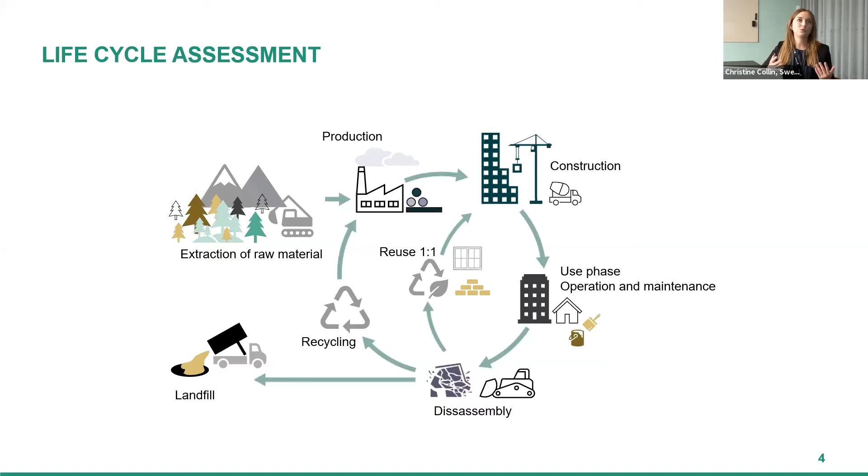And then of course we have a long use phase where we need to operate and maintain our buildings. Perhaps we need to replace some of the building components. And at some point we may need to retrofit or disassemble the building, where we can also either recycle or reuse some of our materials again.

Throughout Europe, we've had a very narrow focus in many years on energy performance of our buildings, on the operational energy use. And what I see in especially the UK, you've started to also have a great focus on the upfront carbon emissions from your buildings, where especially, of course, also structural engineers can make a huge difference.

And when we talk about whole life carbon, we need to, of course, include the entire life cycle of a building. So both the upfront carbon, also the embodied carbon during the use stage when we maintain, repair and replace the materials, and also the end of life carbon when we deconstruct, transport, and also the waste processes and the disposal. So when we talk about the whole life carbon, it's both the embodied carbon and the operational carbon.

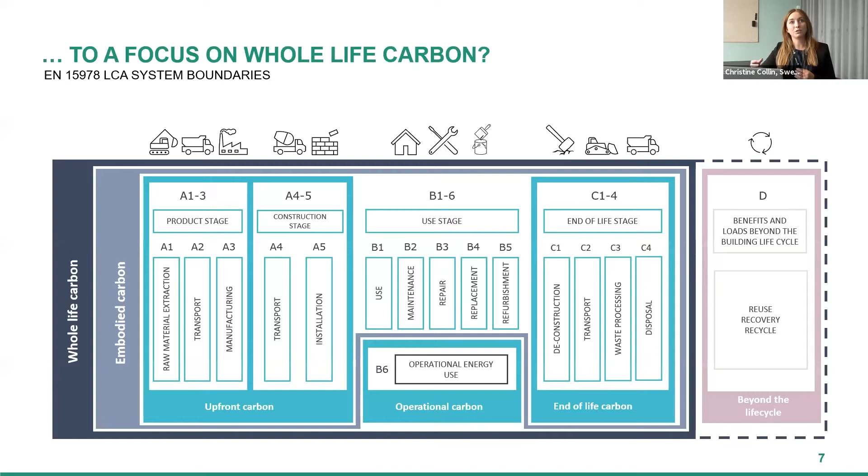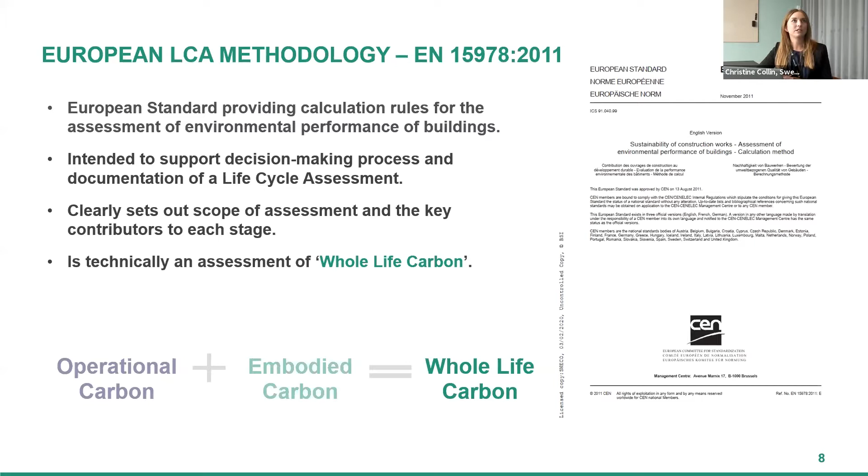And it's based on this European standard, which sets the calculation rules for the assessment and is intended to really support the decision-making process and the documentation of a life cycle assessment. I won't go into more detail with that.

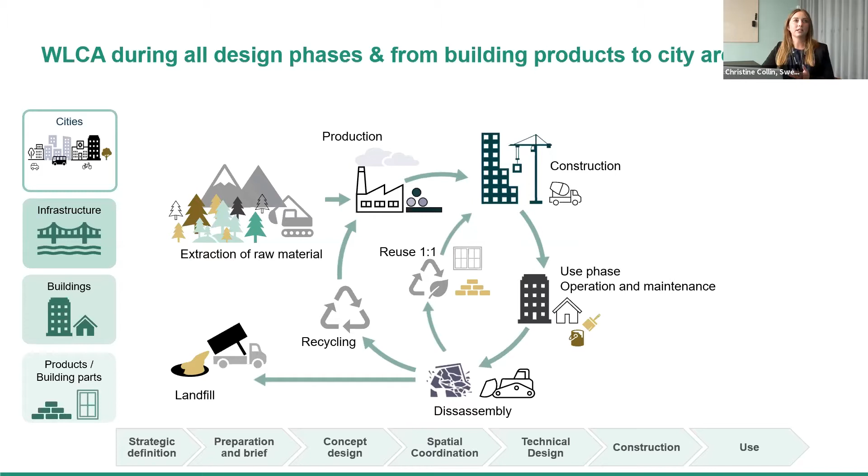But what we see is you can really use the whole life cycle carbon or whole life carbon assessment during all design phases, and also from both building products to building elements, larger buildings, infrastructure projects, or even city areas. But of course, you need to work with it in different ways depending on the type of project and also in which project stage you're at.

Oftentimes it's only conducted at the very later stages when we have a lot of information, because we of course need a lot of information to conduct these assessments. But then it really is just a declaration of the carbon emissions. It will grant you some credits in the certification system, and you may be able to use it in the CO2 accounting, but you can't really make any design changes at this point.

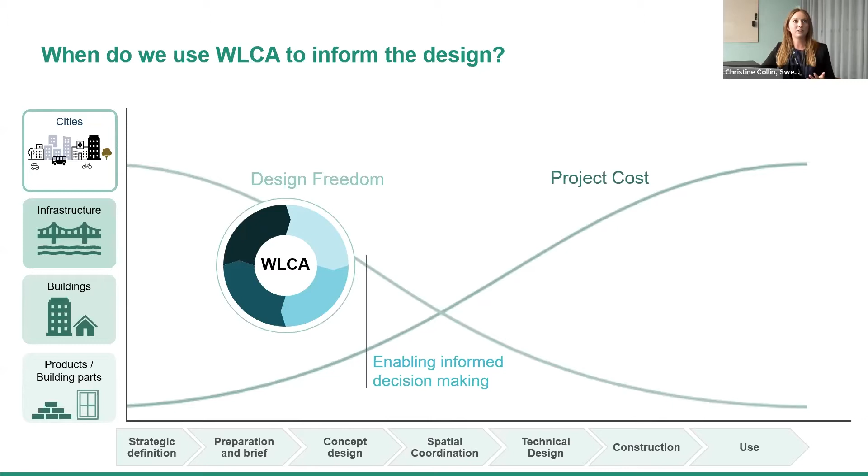So what we're really trying to do a lot of the time is move these whole life carbon assessments to the earlier design phases, where we can actually enable an informed decision making. That is of course difficult when you don't have a lot of information, but there are various ways to work with it anyway. So for example, in the very early phases in the strategic definition, you may not have any real quantities, areas even, but you will probably know what type of building you want to build, and for that you can set targets.

And I can see that in the UK you have both RIBA and LETI; they've come up with some suggestions for potential targets that you can set for a building. If you're a large engineering or architectural consultancy, you may also have your own benchmark database where you can look at where an office building of a certain size previously ended up CO2 emission-wise. And in that way, be able to set either ambitious targets or just normal targets for this building.

Then, of course, you can also use a whole life carbon assessment in a sort of screening way, so that you ensure you meet the target, even though you don't know a lot about what materials are going into the building at this very early stage. You may be able to use standard building components that you are traditionally using, start out with that, and see if you're able to meet the target. If not, then proceed with optimization.

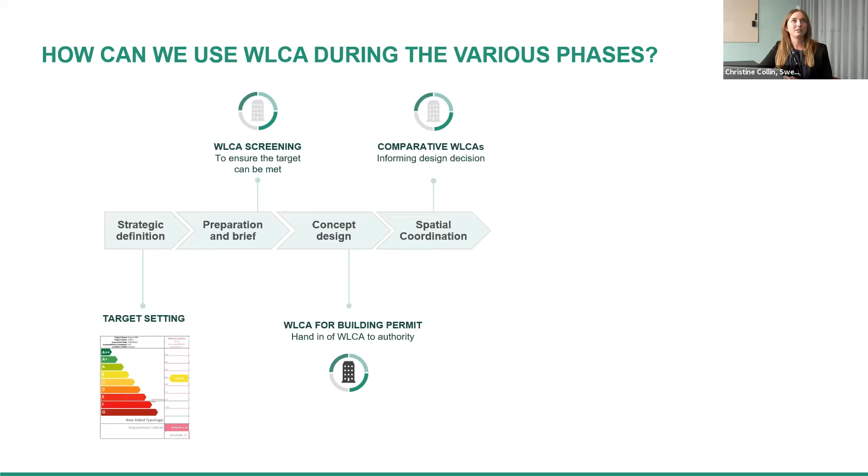And during the design, we can make comparative whole life carbon assessments, comparing different solutions to each other, and in that way make informed design decisions. That can not only be on carbon, it could also be on cost, on energy, on many various aspects.

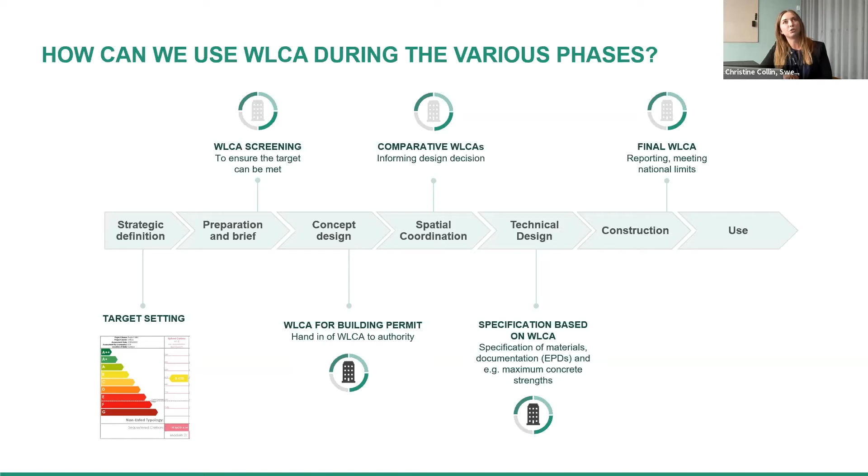And then, of course, we can use the whole life carbon assessment to also know what we should specify. That could also be that we want to specify that the materials used in the building have declared their carbon emissions. That could be something like EPDs, environmental product declarations. And then, of course, in the end, we'll have a final reporting ensuring that we're meeting national limits or the limits set by the client.

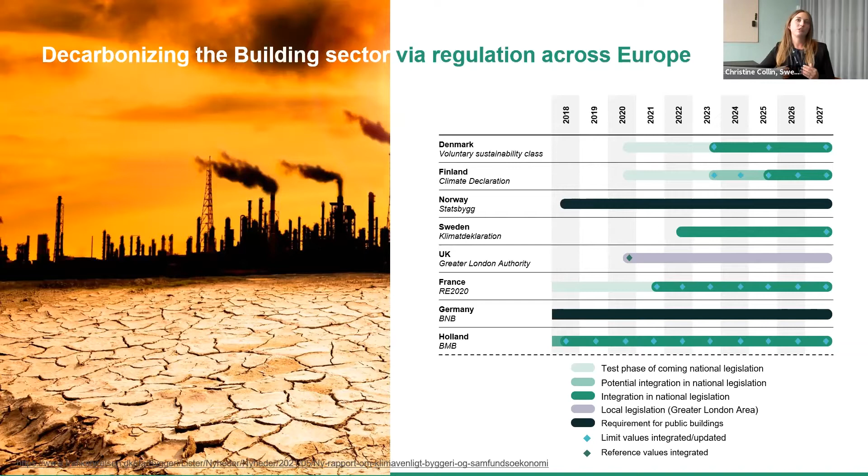So now I'm getting back to the regulation across Europe. As I said, in Denmark in 2023, we'll have national legislation in our building requirements that we need to conduct whole life carbon assessments for all new buildings. And for buildings above 1,000 square meters, they also need to comply with a certain limit that we cannot go above. And actually, we see the same picture in many of the European countries. In the UK, you have a local legislation for the Greater London area, which was introduced in 2020. So there are various ways of introducing this across countries in Europe.

And what I'm about to say with that is, here in Denmark, I've just listed the limit values that we have, and you may find them hard to translate into what makes sense in the UK. And also it's really not something that you should do, because, for example, in Denmark, when we calculate the square meters of our buildings, we also take into account the outside of the walls, whereas I believe you're on the internal side of the outer walls in the UK. So when you have a limit value which is per square meter, it will be completely different.

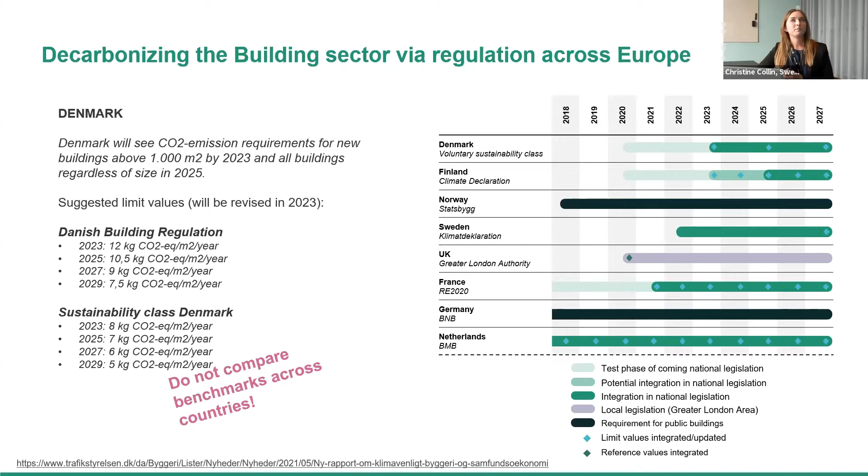And some other things that are also different across the countries is that the different countries actually look at different life cycle modules. So even though we all have the same European standard, not all countries are focusing on all the life cycle modules, because some of them can be quite hard to quantify and we don't have a lot of data for them. So that's another reason why it can be difficult to compare between the countries.

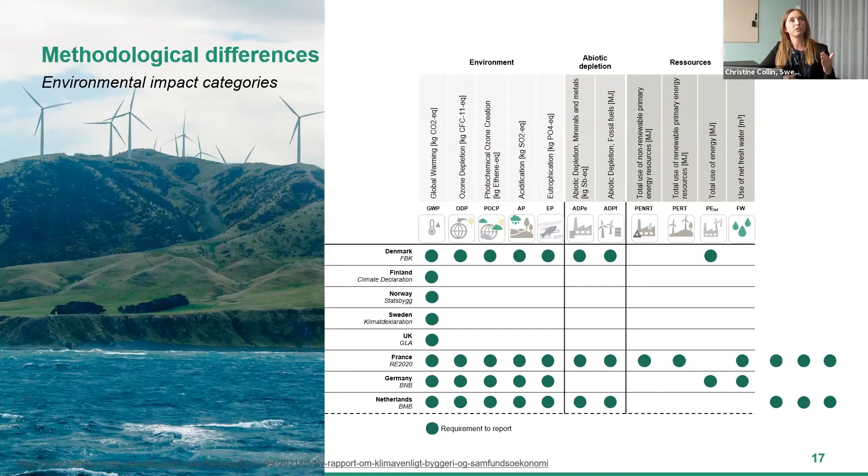Similarly, now we're talking about carbon emissions, but actually in a lot of the European countries, Denmark, France, Germany, the Netherlands, we are not only to report on carbon, we also report on a lot of other environmental impact categories. And in France and in the Netherlands, you can see I have put some more dots because they actually report on even more impact categories. Of course, the focus is often on global warming potential, and so it should be. But we do see an increase in clients also asking us to specifically report on reductions in some of the other environmental impact categories.

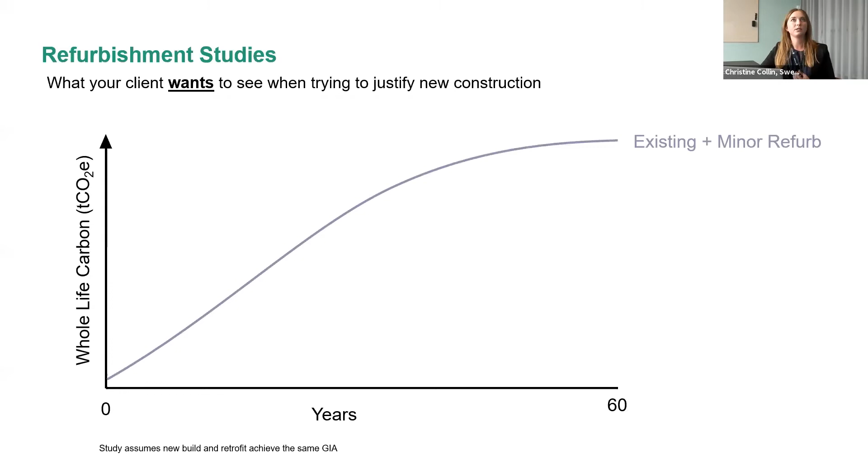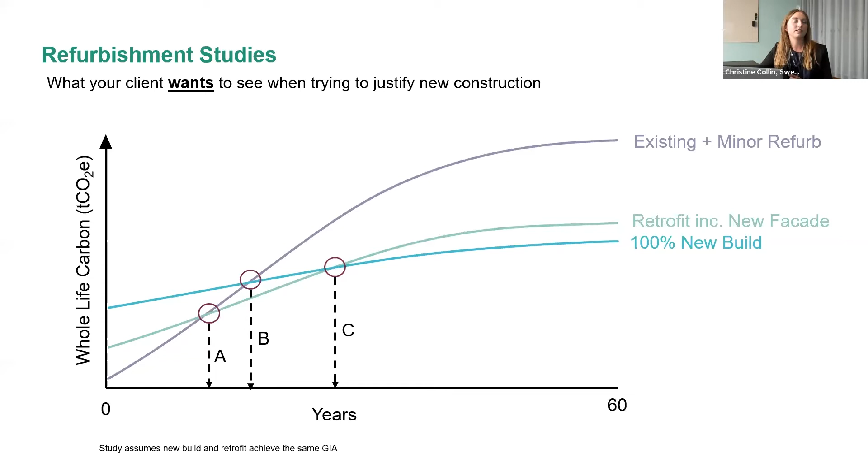Then I have a short case on refurbishment versus new build, because this is one of the cases where it can be really important to look at whole life carbon assessments. So often we have clients that want to justify a new construction. They say the existing building with a minor refurbishment will just have a lot of CO2 emissions over the years, whereas if we do a larger retrofit and a new facade, we can decrease the emissions over a 60-year lifespan. And they say, well, a new build will be a lot more efficient and therefore have even lower CO2 emissions. But it's often really not the case.

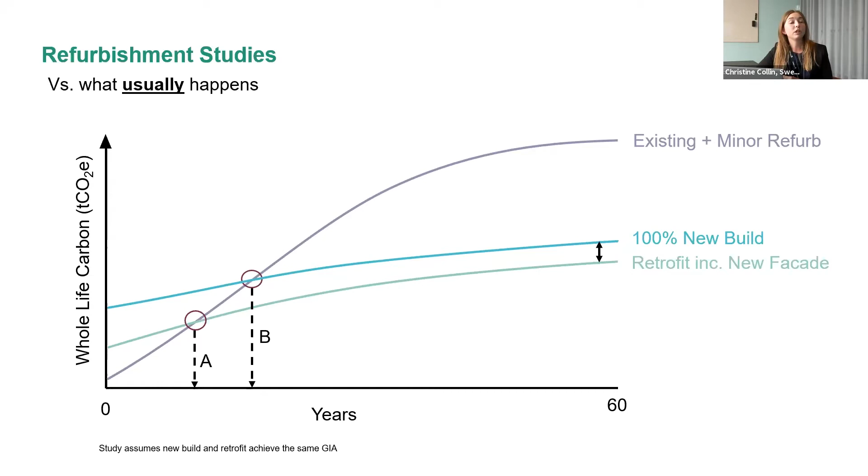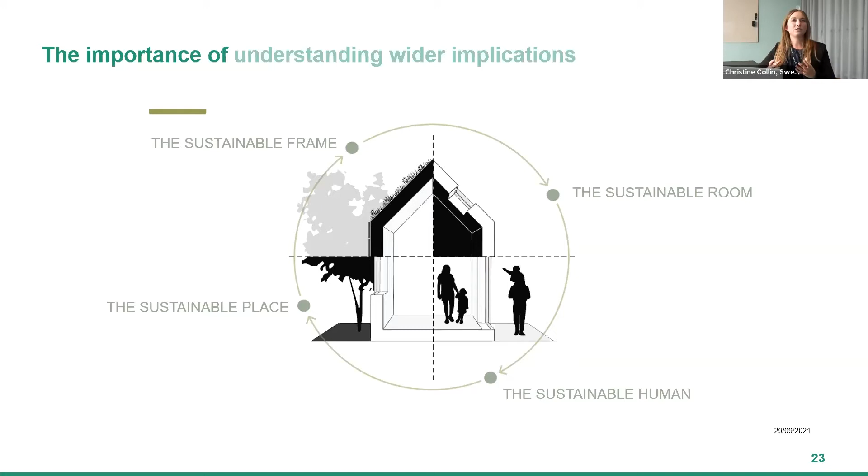And we do also see some projects where it perhaps will make sense to build something new. And this is also a new building according to the standard building regulation that can of course be improved tremendously if you design for it. So collaboration is key in this. And we often talk about the sustainable frame, the sustainable room, the sustainable place, and the sustainable human. And it is important that we take all this into consideration when we design our buildings.

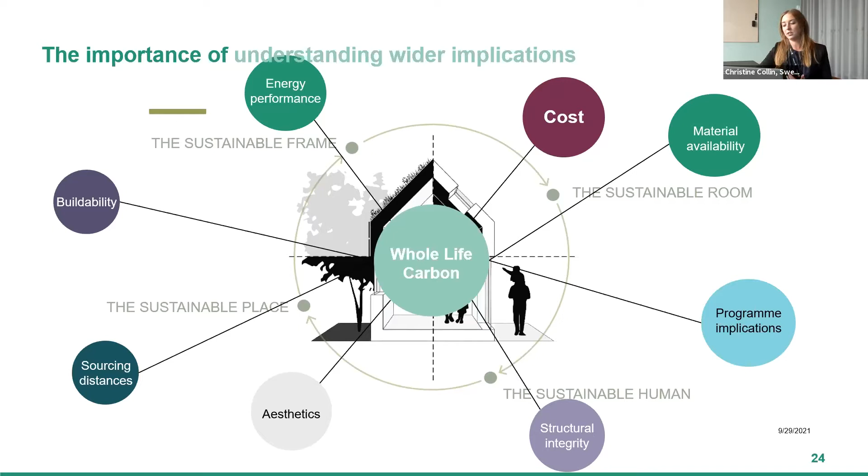And there are a lot of things to really take into consideration: cost, material availability, especially now. I don't know how the situation is in the UK, but in Denmark, it's really, really hard to get materials. Sourcing distances, aesthetics, and these sort of things, and really have it all come together.

And one thing I didn't have a lot of time to talk about is, for example, circular design, which might not benefit us here and now when we are designing our buildings, but we also really need to consider how we can design so that we can use our buildings as material banks in the future, making sure that we're able to continue to directly reuse building components.

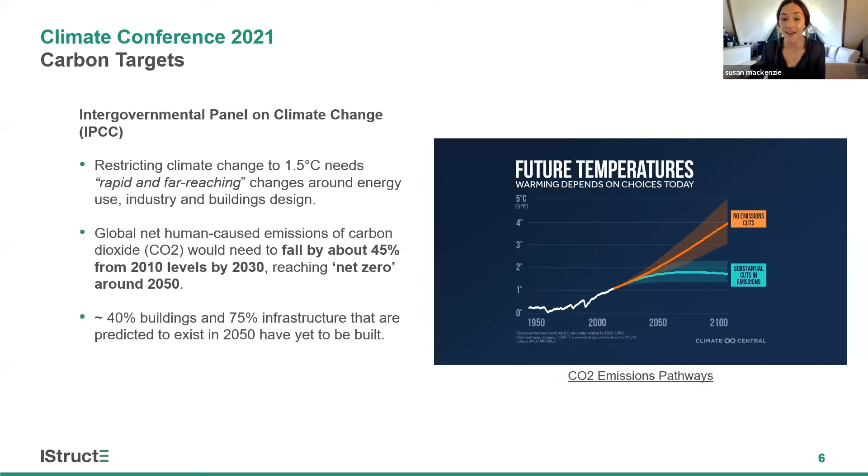And just to pick up one of the things there, so 40% of the buildings and 75% of infrastructure that are projected to exist in 2050 have yet to be built. So just to show the scale of what we're dealing with here. Yeah, in terms of the built environment and buildings kind of targets.

So within the UNFCCC, there's the Marrakesh Partnership, which was launched in 2016. And that is responsible for setting out the climate action pathways for how we get to a 1.5 degree Celsius resilient world. And one of those pathways is the built environment one, which you can see on the screen here. It's a really interesting report actually, and the table here sets out the milestones to 2050.

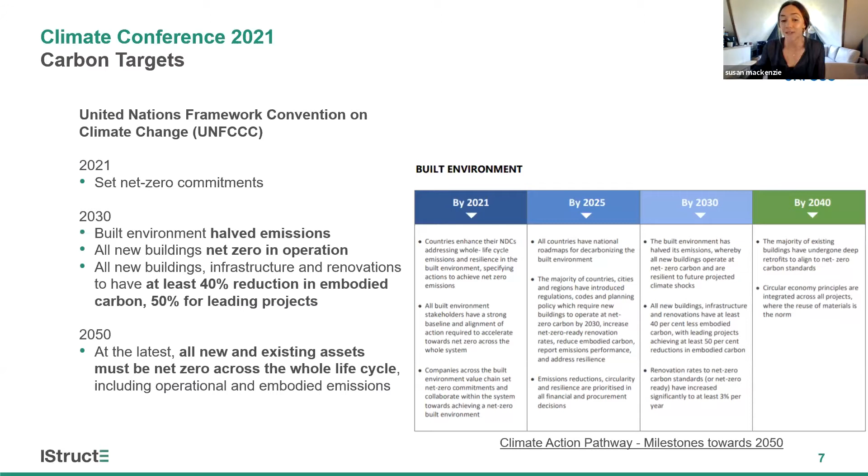And just to pull out some of those things, so by 2021, companies right across the built environment value chain should set out their net zero commitments. And then by 2030, the same kind of targets again, so halving built environment emissions by 2030, all new buildings net zero in operation, and all new buildings, infrastructure or renovations to have at least 40% reduction in embodied carbon, and 50% for leading projects. And then by 2050, all new and existing assets to be net zero across the whole life cycle.

And again, in consensus with that as well is the World Green Building Council, which is a non-profit organisation and global network of national green building councils, which was founded in 2002. And there's two key elements to the World Green Building Council work around net zero. So they have the net zero carbon buildings commitment, which was just updated recently to include embodied as part of the commitment for 2030. And that's just shown on the screen. And then, in agreement with what's been set out by the UNFCCC, they have the whole life carbon vision, which again is 2030 and 2050 targets for net zero.

So then just to look at project level targets. So as we've heard this morning, there are a number of different pathways, reporting frameworks, and different target initiatives which have set out what to do on projects. And so it was really useful to listen to Yannick's presentation on that in terms of legislation and policies around this, and how it's different in different countries, and it's also moving very fast. And also Christine's presentation showing some of the European targets as well. And I've just got a snapshot of a few to talk through today. I guess it's just signposting some of these things for people to be aware of and to delve into, to help then with actually setting this out on your projects.

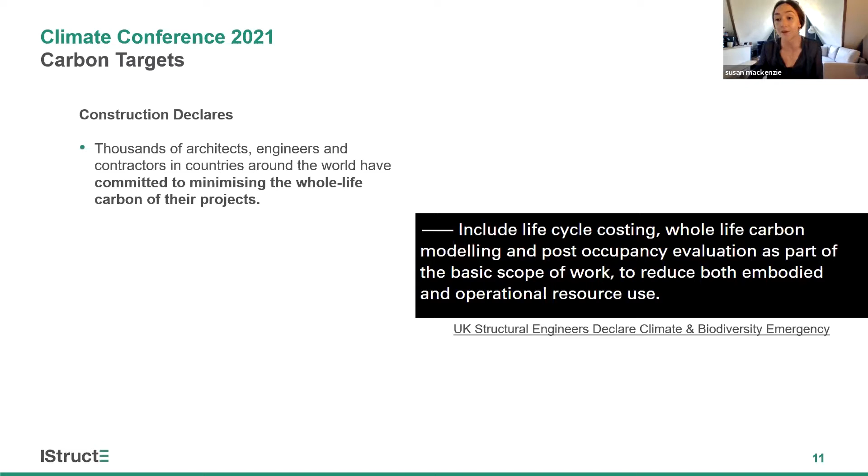So just to jump in, we've got Construction Declares, which is something that most architects and engineering firms and contractors have signed up to. And in that, there is a commitment to minimise whole life carbon on projects. And one of the objectives set out by UK Structural Engineers Declare was around whole life carbon modelling to be included as a basic part of scope. So just a reminder of that commitment that most of our companies and firms have signed up to, that we need to fulfil.

And then there's the World Business Council for Sustainable Development. This is a bit of a test of all these different acronyms. They have proposed a new framework that can be used as a common language for carbon emissions by all actors of the built environment. And just recently they published this report with some colleagues from Arup, which is really useful.

Look at 6 case studies that look at whole life cycle assessments and look at the challenges and the barriers and opportunity around this in the industry, and looking at carbon footprints. So it's a really useful report and really great in terms of actually looking at some numbers, which is always of interest to engineers. So I recommend having a look at that.

And just to pluck out one of the findings here around some of the studies that they did looking at embodied carbon targets, which put a 2030 target of 600 kilograms of embodied carbon per metre squared. Now that was based on gathering some benchmark data around a baseline case, which came out at about 1,000 kilograms of embodied carbon per metre squared, and then taking that down to the 40% reduction.

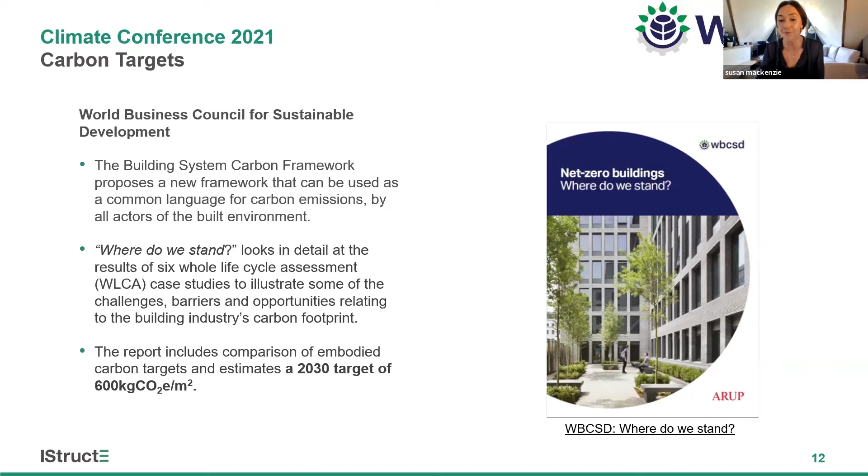But the report actually does then question whether this is ambitious enough, and the fact that we do need to have more data to be able to set these benchmarks and targets for ourselves and continue research and innovation in this space, because no one can definitely say right at this moment in time exactly what the target should be. It's definitely a work in progress, and I think it'd be interesting to see where we are next year in this space.

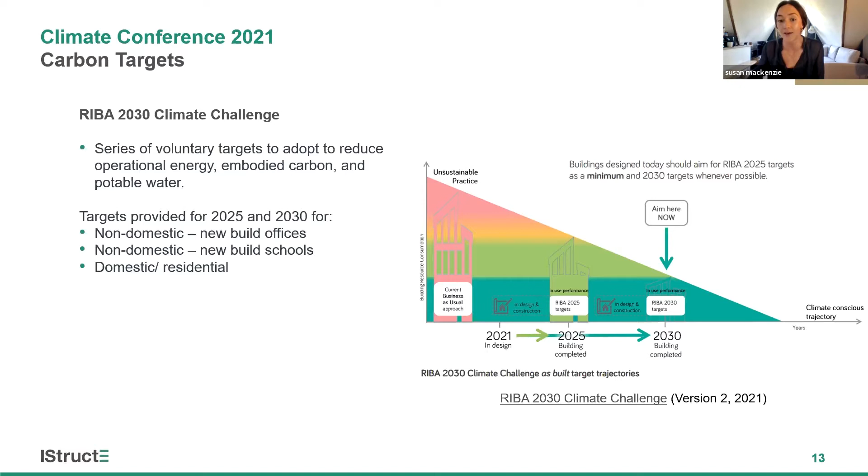And then, some of these are quite UK focused, just to touch on the RIBA 2030 Climate Challenge, which is a series of voluntary targets to reduce operational, embodied and potable water. The targets are provided for 2025 and 2030 for different types of buildings. And the suggestion is that targets set for buildings should be looking at the 2025 targets as a minimum today, but trying to reach for the 2030. And that's because they're actually based on those buildings being in operation. So buildings that are being designed now should be looking at those targets.

And then there's LETI, so that's the London Energy Transformation Initiative, which is a network of built environment professionals who have been looking at this in quite a lot of detail and working with a number of different industry groups to try and get alignment on this, because this is absolutely key. So we need alignment on the definition, scope, measurement methodologies and targets to help the industry move forward with this. So they've actually produced a suite of documents which provide guidance and definitions. And I think Yannick actually shared this earlier. So it's really helpful, and it's definitely a good suite of documents to refer to.

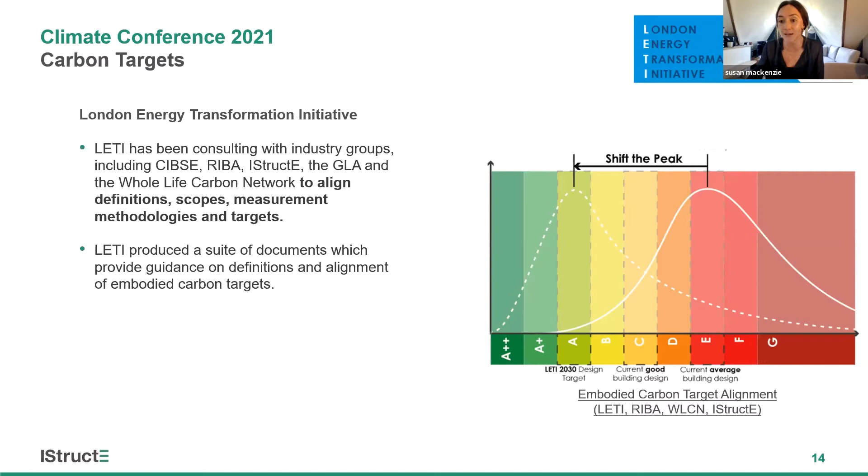And just to point out the diagram on the right here showing that the current average building design sits at around an E in terms of their rating scheme, and that we need to be shifting that peak to A to reach the LETI 2030 design targets. So we definitely have a lot of work to do.

And then, of course, the IStructE SCORS, which is another rating scheme which focuses specifically on the A1 to A5 emissions of the primary structure. And as Will mentioned at the start, it definitely needs to be looked at with the guidance on how to calculate embodied carbon, because this helps outline what the calculation should include and exclude. And then you come out with a rating that can be compared with some confidence that you're actually looking at these things in good comparison with the rest of the industry. So this can be looked at in terms of an option, full asset or portfolio of work. So it's a useful way to compare different options.

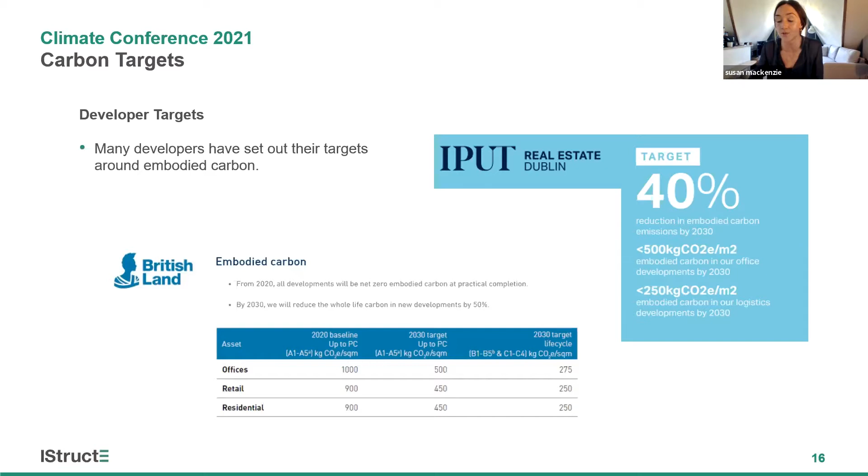So some thoughts on setting targets and carbon actions that we can take. So at a high level, working with clients, making sure we encourage them, if they have been living under a rock for whatever reason, to acknowledge and adopt the guidance that is set out by the IPCC, UNFCCC and Global ABC. Encouraging companies to join the Science Based Targets Initiative and set science-based targets.

And then encouraging owners and developers to sign up for the World Green Building Council Net Zero Carbon Buildings Commitment, or for various clients, encouraging them to sign up to the Race to Zero. So I guess a lot of companies will already have ticked a lot of these boxes, and just to say that maybe it could be a useful starting point for conversations on more specific project targets, to see where they have made commitments already, and to see whether you can use this to start the conversation if you can see that they are signed up for these things already, just to help remind them of their commitments and then push it through on projects as well.

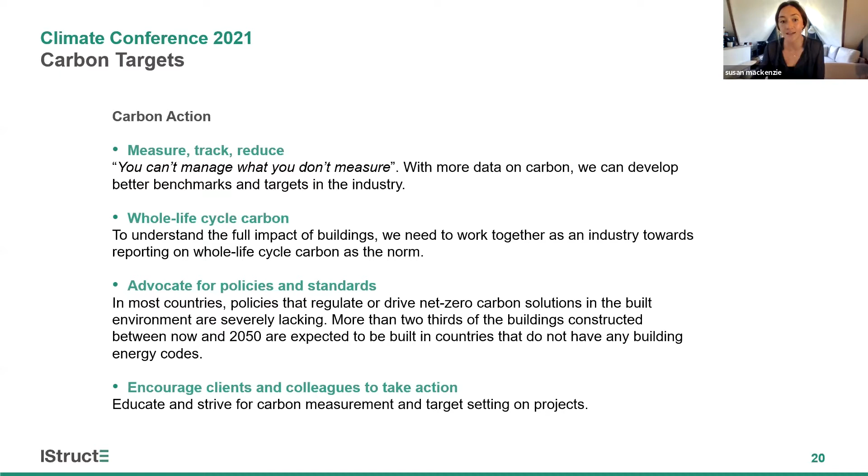And then encouraging clients and colleagues to take action. I think a lot of the people here on the call today are probably of the mindset already that this is the right thing to do, but not everybody's in the same space. So just doing what you can to educate others and strive for carbon measurement and target setting on your projects. And that's it. I think I'm okay for time. I have a summary slide, but that can be there for the pack.

Perfect. Thank you, Susan.

Thanks. What's really interesting about the talks we've heard so far this morning, and your one captured a lot of that in one place, was how much progress has happened in the last year on understanding the numbers side of carbon. Last year there was talk, we need to work out what business as usual is, we need to work out what people should be committing to in terms of targets. And today so far we've heard Grosvenor talking about 50% by 2030, targeting 500 kilos of carbon per square metre. The Outlook report was showing 600. LETI shows 600. The IPCC and UNFCCC are all calling for 50% by 2030.

The numbers are never quite the same, but they're always in the same order of magnitude and the same level of ambition. I think that's a really important message that people can take away, that there is real progress happening on this. And whilst we might not have all yet agreed that we need to be targeting X by this date, we're all pretty agreed on what the ballpark is. And if you're working on projects that are doing something different, then you can raise that with the client and say, well, all of these people are saying we should be doing this now. How do we get there?

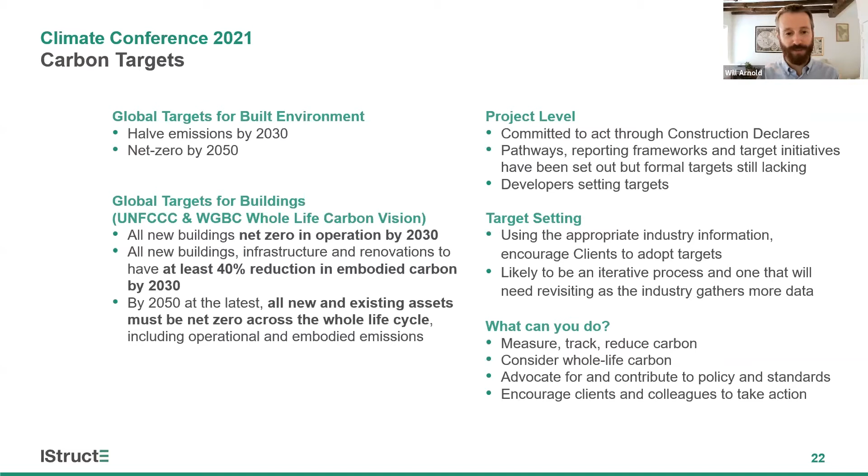I wanted to ask one to Christine first, because Christine, you spoke a lot about collaboration, and if we then think about what Susan's just been saying around targets, I'm keen to know what advice you would give to structural engineers who want to set carbon targets, but where the rest of the project team isn't yet talking about this. So what advice would you give to the engineer who's maybe the sort of lone wolf in the room?

Well, I think just keep pushing, keep asking the question, shouldn't we have a carbon target for this? I see a lot of the times that it's actually one of the team members that is really pushing for it, and in the end the client sees, well, of course we should have targets. It may not be the structural engineer, it could be the architect or the HVAC, but oftentimes it's just one person that is really keen to get this through, and often they succeed as well.

And Susan, do you have any thoughts to add to that as well? Because you must have been in this position at least once, right? Yeah, definitely. I think it's pushing it through and keeping asking the questions about what are we doing on our projects and how are we tackling this, and I think the absolute key is to be measuring it and then understanding it better,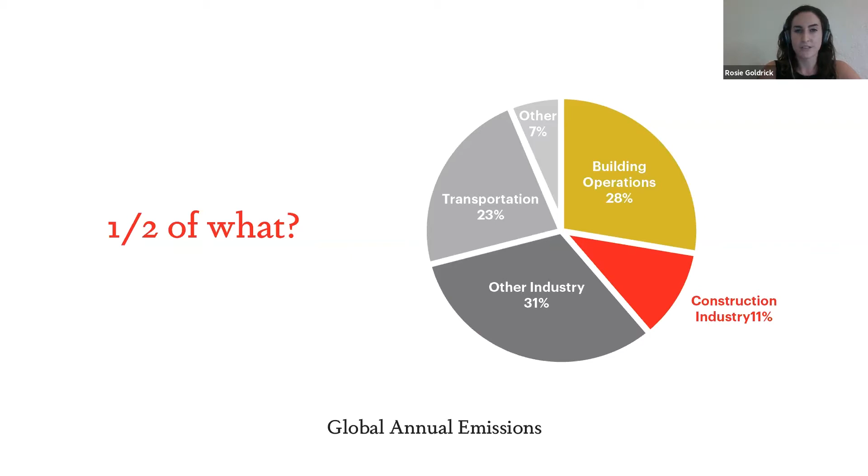We need to halve our embodied carbon emissions by 2030. And as practitioners, we're entirely responsible for this 40% of emissions, and we need to be accountable. And so we need to understand half of what. As Susan said earlier, you can't manage what you don't measure. So internally, we've committed to taking stock of all of our projects over the last few years, and been pleasantly surprised that our average is already close to half of the global average. Projects we designed 10 years ago were already meeting these targets in some cases.

But in order to actually benchmark ourselves, we had to develop some of our own carbon coefficients. For example, the fired bricks we used were fired with coffee husks. Coffee is a big industry in Rwanda, so coffee husks are a big waste product, and European or American data wouldn't have been particularly relevant. So we developed our own carbon targets. If you want to know more, my colleague James Kitchen wrote a good article recently in The Structural Engineer about how we went about it.

So how was it that 10 years ago we were already meeting these targets? When we designed Butaro Hospital, back in 2008, it was in an area that didn't have electricity yet, and yet there was an ambition to build a state-of-the-art hospital. So the resource limited context actually took care of the constraints, and the principles that governed the design as a result were mainly local fabrication.

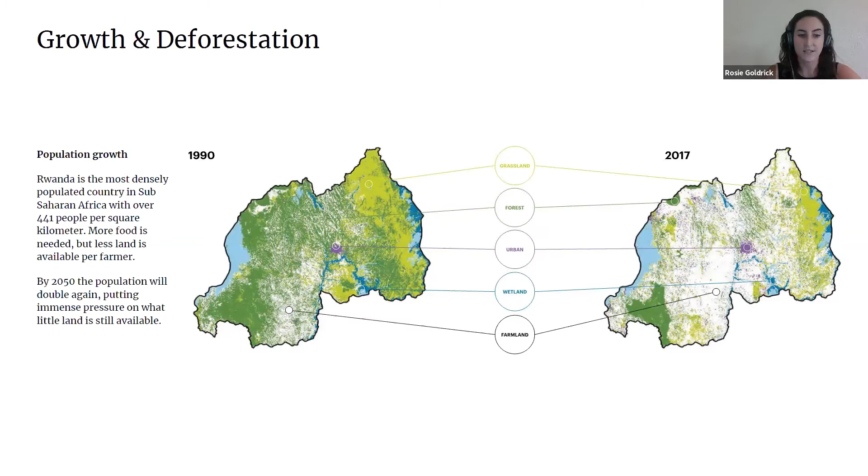Rosie, we're having trouble hearing you, so maybe if you turn off your camera. You want me to turn off the camera, yeah? Yeah, I think it might just help keep the connection for your voice a bit better. All right.

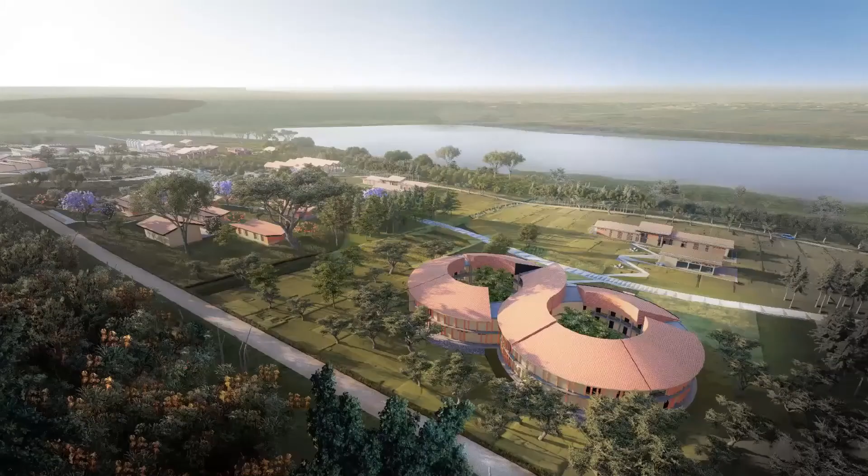So the design was a collaboration between MASS and Arup. MASS were responsible for the architectural design and building services and overseeing the construction of the campus. Arup did the civils design, and the structural design was actually a collaboration between MASS and Arup. And this is actually a project that Will and I worked on together. He was seconded to us from Arup at the time and led a lot of this design.

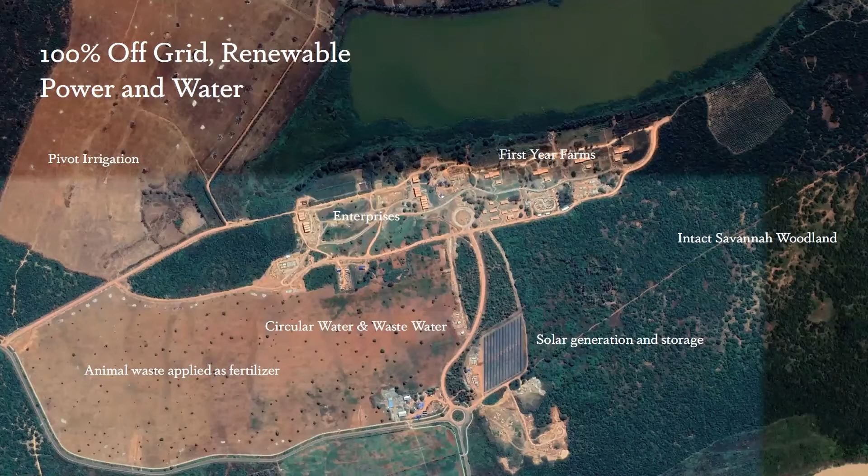And so the campus is completely off-grid. We've got a solar array which produces 100% of the electricity, and it sources and treats all of the water on site. And the structural design brief for the Institute demanded high quality buildings that really stood the test of time. We had 69 of them to design over a very short period of time. And so we had to work very closely with the architects to manage the design principles and also apply the principles of local fabrication at scale.

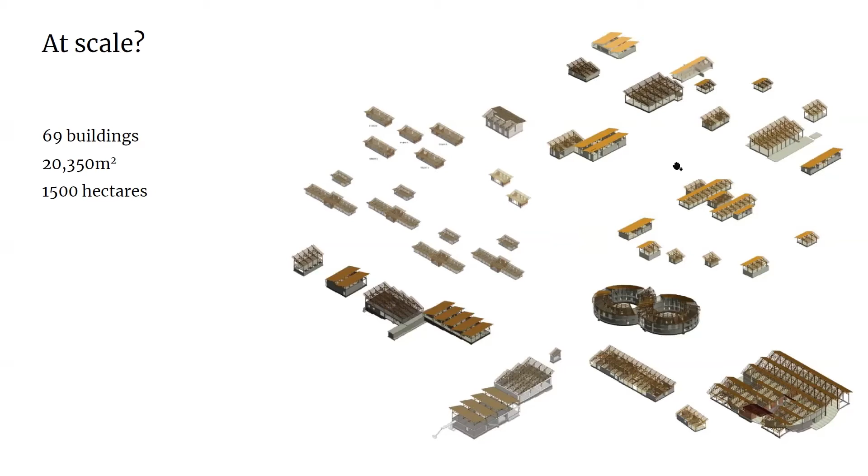But just something to be aware of, Rwanda is seismic, and so we had to follow the Eurocode guidance for structural regularity very closely, trying to create symmetry in both directions, adding movement joints where necessary. And this allowed us to design many of the buildings quite quickly using the lateral force method. And there were a few feature buildings that we did modal response spectrum analysis on.

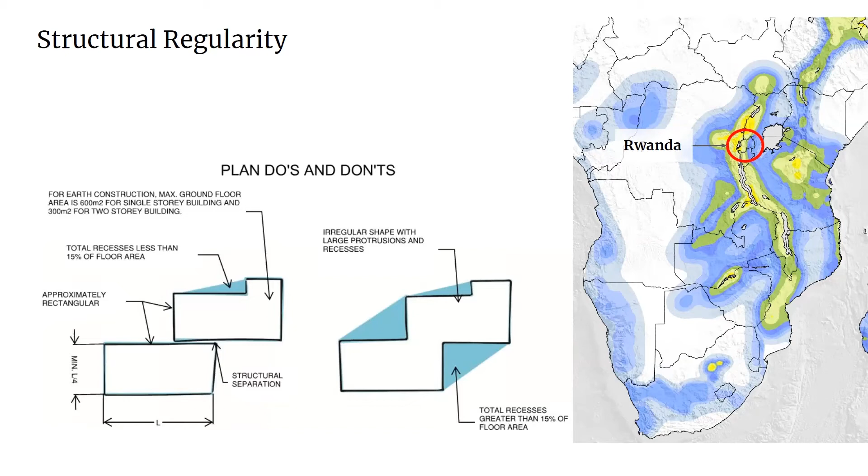So following on from the ethos of the campus in terms of conservation, we were really interested in designing with earth, particularly having the benefit of a large site. And so the way we approached this was to carry out upfront testing of earth as a feasibility study for whether we could really do this. And this is my colleague Amab, who spent a lot of time preparing samples of different soil sources with different stabilizer quantities, and this data informed our design process.

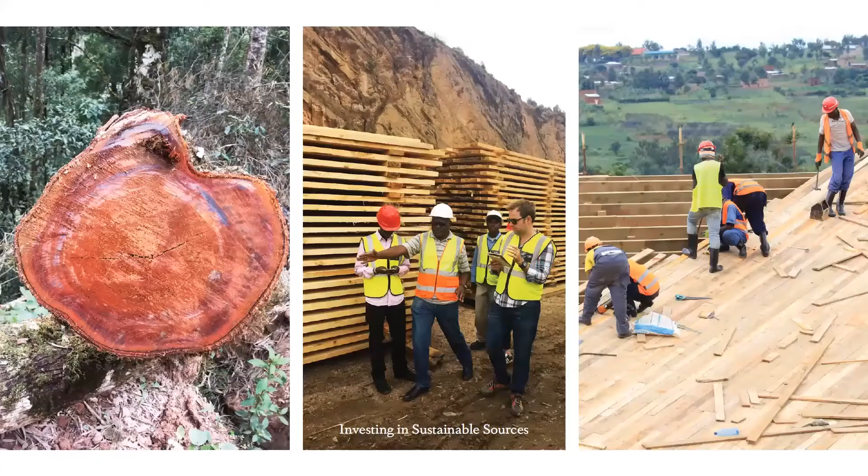We also investigated sustainable sources of timber regionally. We were really excited that a new company had just set up in the south of Rwanda, a mill called New Forests. And so we discussed the timber member sizes with them. The maximum length was 4 meters, which was based on their kiln size, and the maximum depth was 200 millimeters, which was based on the fact that the trees were fairly small.

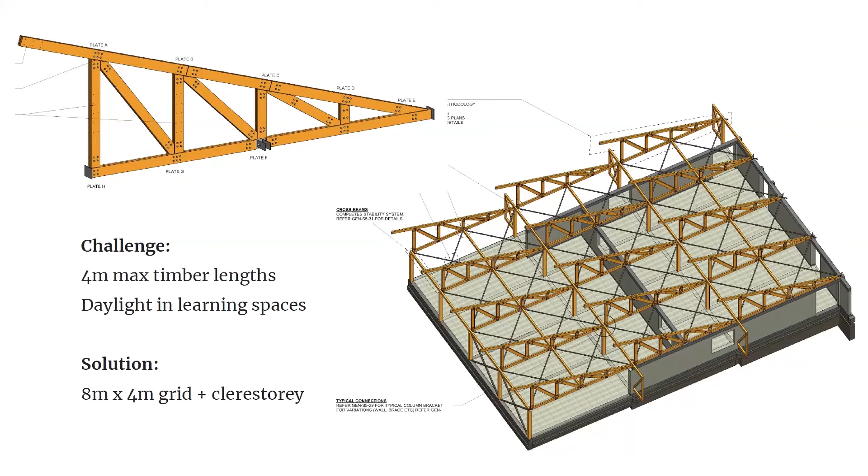And there was no engineered timber, but we still wanted to be able to do fairly long spans with solid timber. So we used this data to define the structural grid. So we developed an 8-meter spanning truss, which was made of two 4-meter pieces, as you can see here with the joint in the middle. And the grid was therefore 8 meters with this truss by 4 meters in the other direction. And the truss shape also allowed a lot of daylighting into the learning spaces through a clerestory.

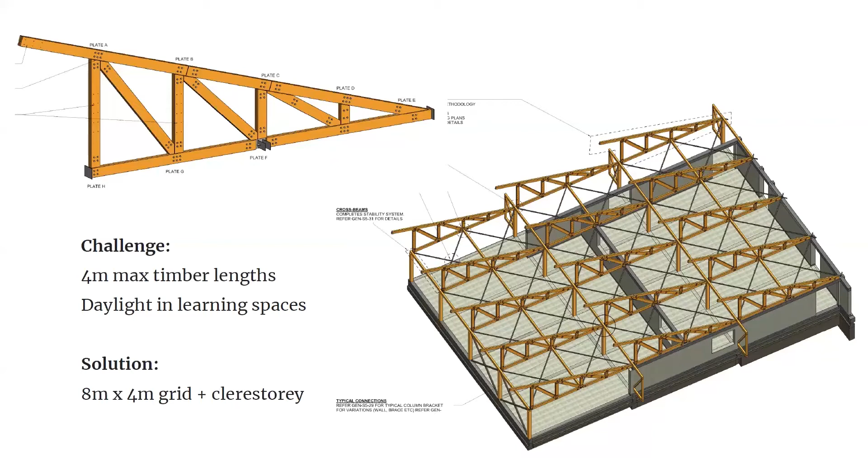So generally the materials for the project were ceramic roof tiling fired with coffee husks, timber roof structures, and earth walls, either rammed earth or compressed stabilized earth blocks, and stone foundations. So it was really a dream project for me as a structural engineer, but of course designing with natural materials is not without its challenges. In order for us to use them, we need data to design with.

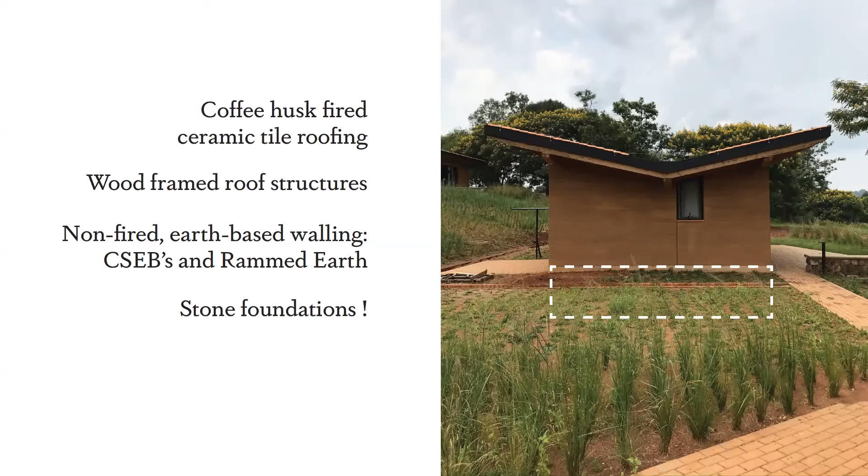So for earth, we collected this during the feasibility study. For timber, however, we were perhaps too theoretical at the start. We worked with our partners at Arup, they're timber experts, and we worked with the mill. So the mill didn't do any kind of visual or mechanical grading and had no test data to date. So we took the species and the density, and we looked at reported data from other forests worldwide with that species.

And then during construction, we trained the mills and the contractor to carry out visual grading. But we found that we were getting a huge rejection rate of about 70%. And it was mainly due to these knots, which come from branches. So the forests in Rwanda and in this region have not been managed consistently, and the strengths we assumed were based on managed forests. So we find that here we've got a lot of trees where they haven't been pruned over the years. And so the branches are what causes the knots, and that leads to great variability in strength and a much lower strength generally.

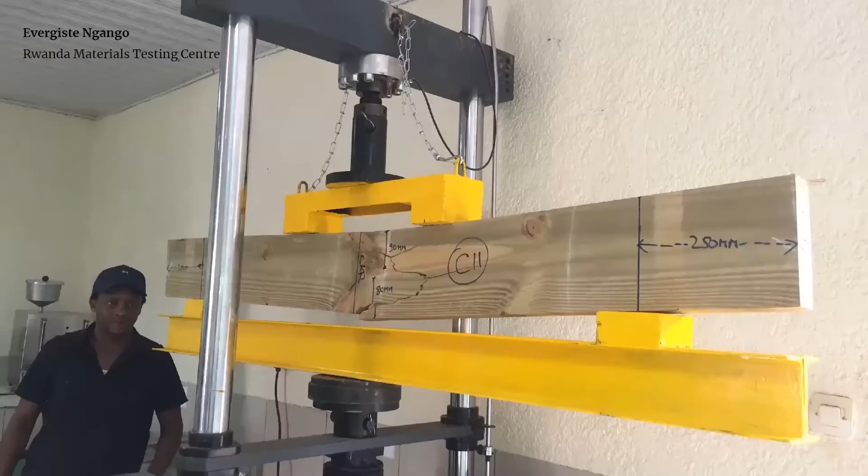So in order to accept more timber, because a 70% rejection rate just wasn't feasible, we decided to carry out testing and define our own grade of timber specific to this project, which was based on the percentage of knots that would allow for a reasonable acceptance rate. And it did turn out to be weaker than expected, mainly due to the variability. So what we learned really was that we should have approached this in the same way we approached the earth, with upfront testing and making no assumptions based on information from other contexts.

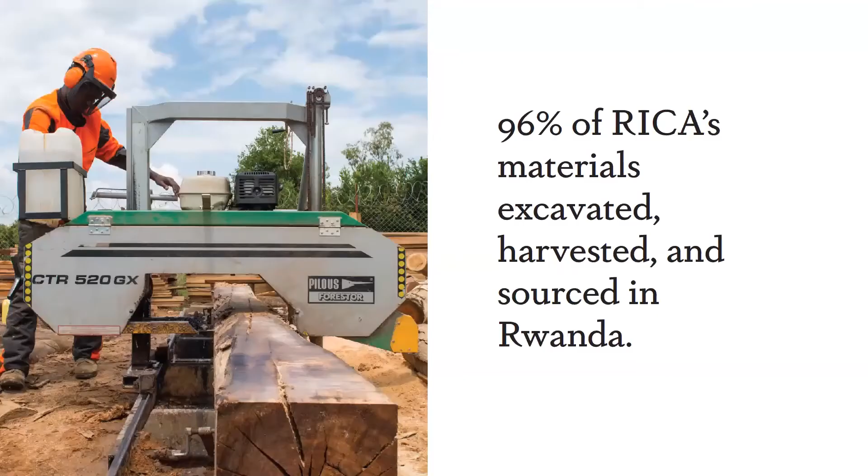So this is one of the challenges in the industry, particularly here. Low carbon materials are not always easy to design or construct with because we don't have data. So we've got a great understanding of this now, but we were lucky to have the resources on this project to do this kind of testing, and it's certainly a barrier to others. But in the end, it was a success. We sourced 96% of materials in Rwanda, 98% of labor was sourced within 100 miles. And ultimately, we achieved a 58% reduction in the embodied carbon compared to the business as usual approach.

And it is worth this investment in upfront material testing. This is where we need to be headed. And despite the challenges, we actually have no choice. As engineers and architects, we need to be creative in the use of local materials. And whenever there is data that's lacking, we should seek to create it rather than see it as a barrier.

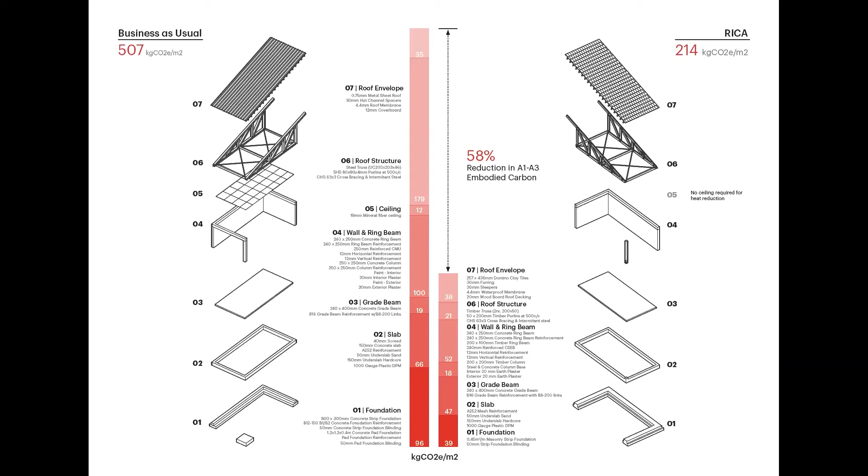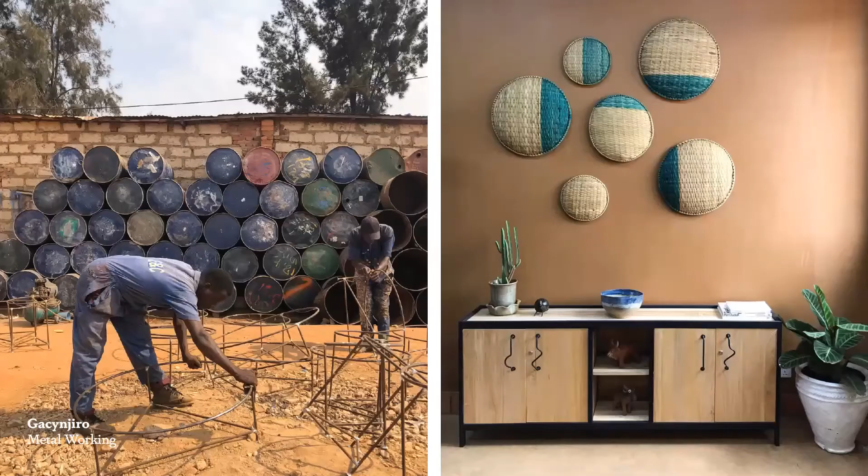And this ethos was applied throughout the project to the furniture, fixtures and fittings as well. So this is Rolaris making the tiles. All of the light fixtures were made in country. The metalworking was done in Gacynjiro. The banana weavers made all of the sofas to really high quality. Our FFE team went out touring the country at the beginning of the project to find all of the makers. So this is great. This is how we got to half or just less than half.

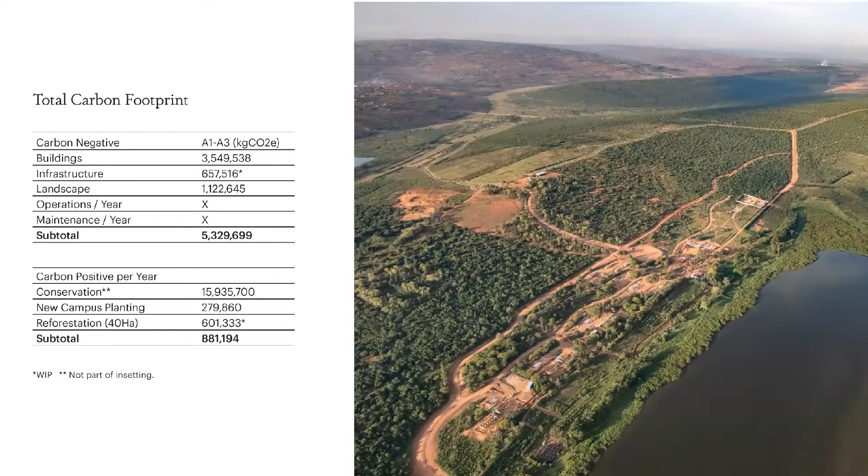But how can we get to zero, and how can we get to carbon positive? And really, that's around conservation, restoration, and regeneration of landscape. So we calculated the embodied carbon of all the buildings and infrastructure on the campus, and we developed a purposeful reforestation plan along with Rika, which allows the project to be climate positive before 2040. So removing more carbon from that point forward than was produced from the campus's creation and ongoing operations. So it's actually projected now to be the first climate positive university in the world.

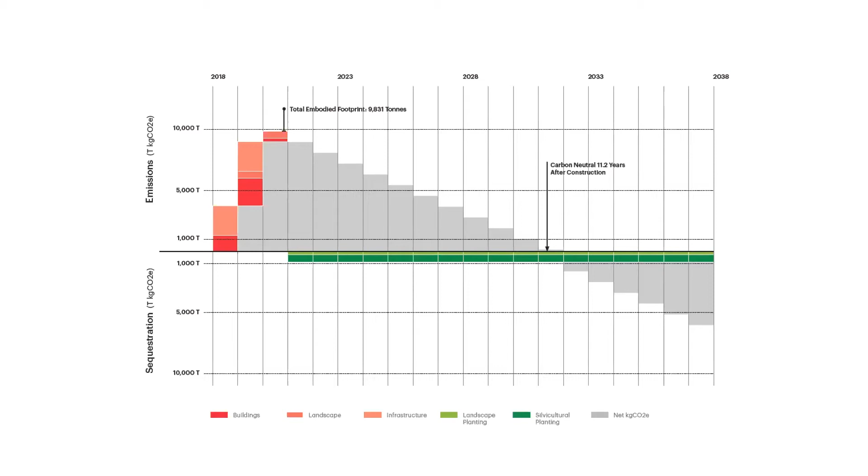So what's next? In order for the market to expand, as structural engineers, we need to be able to easily design and specify these materials. So the supply chains need to be strengthened. The mills need to be supported and required to produce sustainable, treated, graded, tested timber to allow it to be more widely used and in a standard set of sizes.

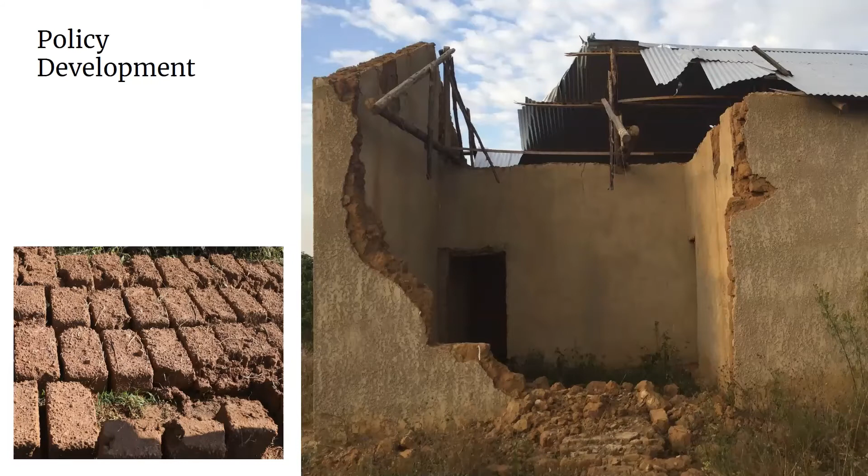And I know that some of you are curious about the policy side of things. The government of Rwanda are also developing policy and strengthening the supply chain of another natural material, the adobe block or mud bricks, which are associated with poor quality and sometimes dangerous construction, but they've recognized that many solutions are required to meet their current housing demands. So they've legalized the material and they're seeking to regulate it. So we've collaborated with the Rwanda Housing Authority, Rwanda Standards Board, Rwanda Polytechnic, Earth Enable and Green Pact Africa to contribute towards research and drafting of these standards, which will inform the regulation.

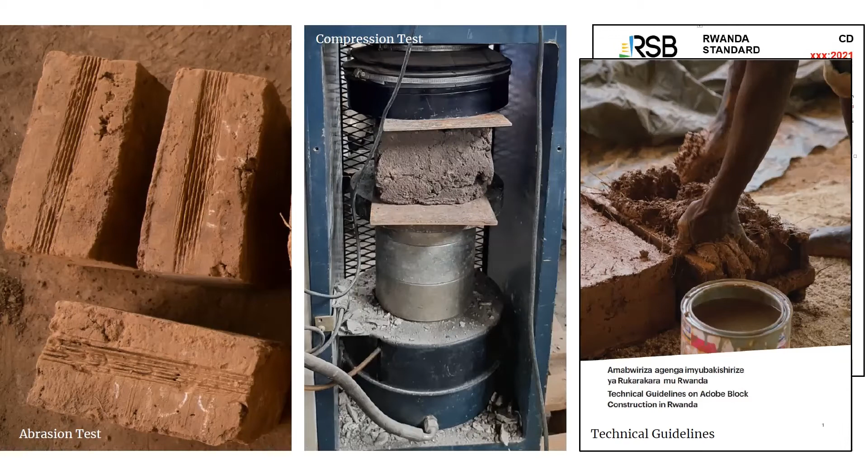Yeah, no, it got much better, don't worry. Thank you, Rosie. Really good as well.

I've heard a lot of people talk over the last couple of years about the need to fast track R&D into practice. And I think that what you just described there around getting timber to work in a country where timber grading didn't really exist, and getting earth to work in the same way, just sort of exemplifies the routes we need to go down if we are going to use new materials, novel materials, low carbon materials. So thank you for sharing your insights on that.

We're going to move now on to Lachlan Ramsey and Richard Feigin, who are joining us from Australia, where it's now about 8:30 in the evening. So thank you, both of you, for giving up your evening to join us.

And a completely different scale, again, of projects. They're going to introduce the Ballarat Gov Hub building, which is one of the few mass timber commercial buildings in the country, and one of the first where the local AECOM team was challenged to start running through carbon figures by the client. So I think there's going to be a lot of different stories to learn from this project, which is why we asked them to talk today. Whichever one of you is going first, over to you.

Thanks, Will. I'm going to start off. My name's Ricky Feigin, and my co-host Lachlan Ramsey and I will be talking about the embodied carbon calculations we've been undertaking for several selected structural projects at the AECOM Melbourne office. I'm going to briefly mention the carbon life cycle, our experience of calculating embodied carbon in the Australian context, and some particular nuances we've encountered when developing our carbon calculations.

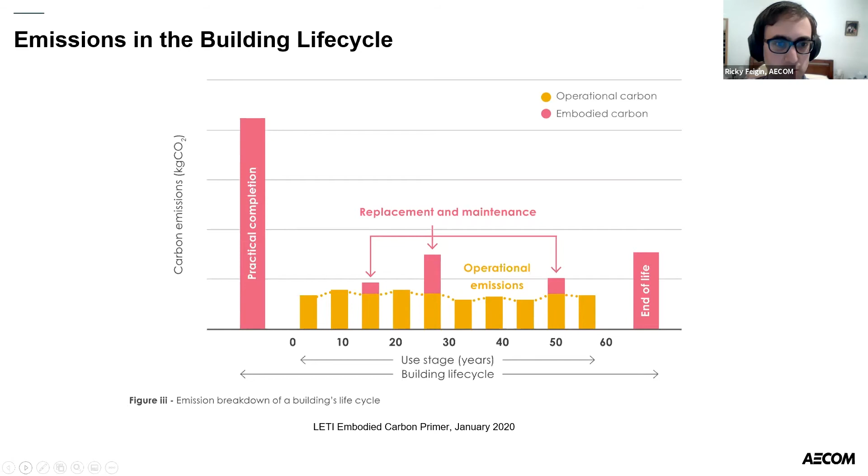So calculating embodied carbon of a structure is really as simple as calculating the volume of materials in the structure and multiplying it by the value of carbon equivalent. Obviously, that's not that simple. There are standard databases for the A1 to A3 life cycle stages, the carbon emitted in producing the material until it's released from the manufacturing plant. Then you've got stages A4 and A5, transport to site and construction, which we can also estimate, and then you get a fairly accurate picture of the start of life emissions.

The calculation sounds simple once you've got this number and calculated your volumes, but coming up with a carbon equivalent factor for a material is not that simple. In Australia, there's a few different databases which combine all the common construction materials.

And they use an average value of carbon based on what's available in the local market. And as you can see, those top two numbers, the values can differ quite significantly. So a more accurate value could be obtained from the EPD, which we've shown at the bottom.

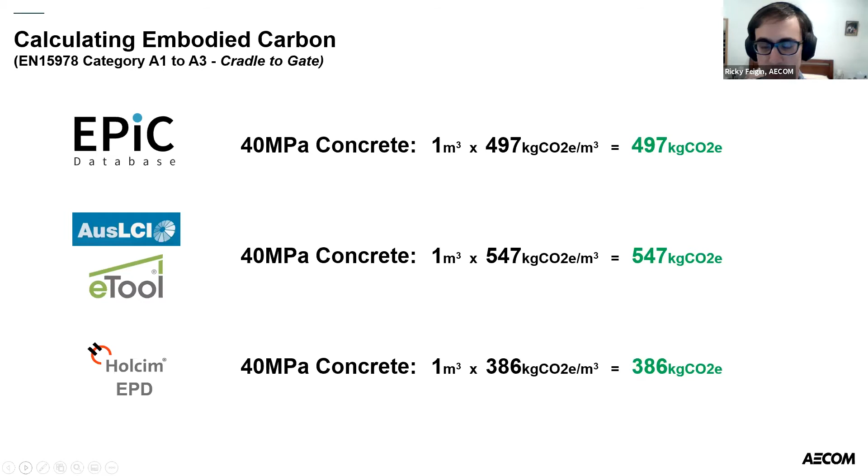But the issue with that is using an EPD might look like you're saving carbon if you get a really good product, but that locks you into a particular product. So early on in a project, you can't really do that because you're locking yourself in and your client might not go for that product.

And carbon sequestration is another piece of the puzzle that we've been looking into. So that's the carbon stored in trees, which are eventually turned into timber, and it can count as a negative emission, so reducing your embodied carbon. Obviously, it's not that simple. There's all sorts of caveats before you can start taking negative emissions.

For example, most timber these days from demolished buildings ends up in landfill. It decomposes, it releases greenhouse gases into the atmosphere. So how that's managed in your landfill makes a big difference to the overall embodied carbon of a building, and it's not something you can control during construction 60 or more years before your demolition. So you need to make realistic assumptions.

And there's also the opportunity cost of the land where the timber's grown. If it wasn't going to be used for a sustainable timber forest, would the land be a natural forest, in which case there's going to be some carbon sequestration already, so you can't really take credit for it all. Or has farmland been bulldozed to build a sustainable forest, meaning that neighbouring farmland might need to be more intensely farmed to produce the same crops, leading to more emissions elsewhere.

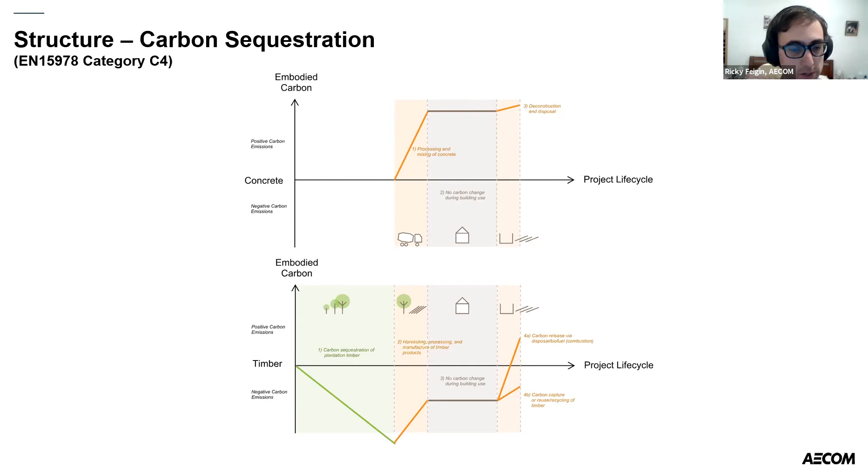So these sorts of things are difficult to estimate from a desk study and can have a big effect on the embodied carbon of a building. So I'll now pass on to Lachlan to talk about our case study.

Thanks, Ricky. So Ricky's given us a bit of an overview of the process that we followed to come up with our numbers for this building. The Ballarat Gov Hub is a 5-storey building that's going to be used by the Victorian government, predominantly for offices, and it was completed in about March this year. And the interesting element with it is it did end up being built out of engineered timber products.

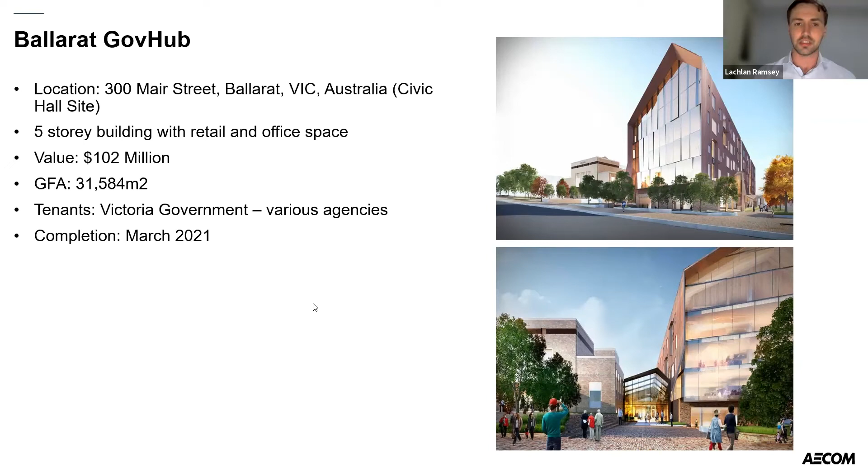So this project actually was a really good one for us to start with, dipping our toe into the water, trying to understand this embodied carbon question, because we were engaged by the client to produce 2 sets of tender documents. So we had a really good starting point for measuring up two distinct structural schemes. The first was a concrete scheme, using what we'd say is a traditional concrete method in Australia of post-tension floor plates, and the timber scheme is a combination of glue laminated beams and columns, as well as cross-laminated timber floors.

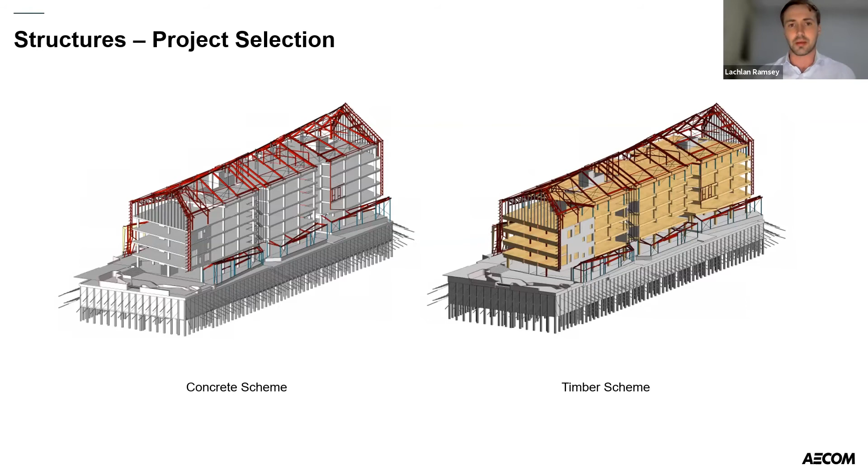The process for us involved measuring up the quantity of the materials and then multiplying it by the coefficient associated with the materials themselves, and applying reinforcing rates so we could get that full bill of quantities, and then we could come up with our number. So we went through that process, and effectively what it showed was that when we include the carbon being sequestered into the timber, there was around about a 30% reduction in the amount of carbon between the timber scheme and the concrete scheme. So that equated to about 2,950 tonnes of carbon.

So what does that really mean in context for the building? Well, our building uses around about 700 tonnes of carbon a year as average operating emissions. So the number equates to about 4 years of operating emissions, which is, I think, quite significant, because you could easily invest a lot of money in improving your HVAC systems, improving your insulation, to try and find those savings through operational methods.

And just to put that into layman's terms, I compared it against my power bill in Victoria for a 2-person household. So it was equivalent to about 1,500 households being turned off for 1 year. And I think it tells an interesting story about the impact that you can have as structural engineers through your work, which can be far more important than the things that you're doing at home.

So really, the time spent at work is very important. The next part of our study, we wanted to understand the relationship between improving the performance of the facade system and what improvements that has on the heating and cooling for the building, but what penalty you pay for going for those higher levels of glazing and putting more embodied carbon into the system. So we looked at the single glaze, double glaze and triple glaze units.

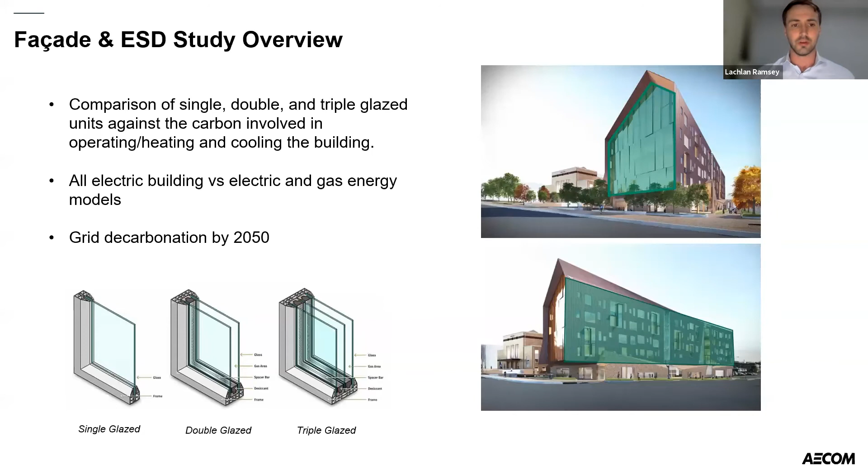So now we used that same process that we did for the structure to come up with our number for the facade. And then effectively now we've got the structure and the facade number, and we wanted to know where we actually stood in comparison to other buildings. So there's not a lot of content for us that's Australia based, but we have sort of leant on the LETI, the London Energy Transformation Initiative targets, which have been spoken about by Susan and a couple of other people already.

So if you're starting out and trying to understand how to approach this, the LETI Carbon Primer is a really good resource, and I definitely recommend having a look through that. They've also got some guidance in there for just general rules of thumb about what percentage split should be between substructure and MEP and facade.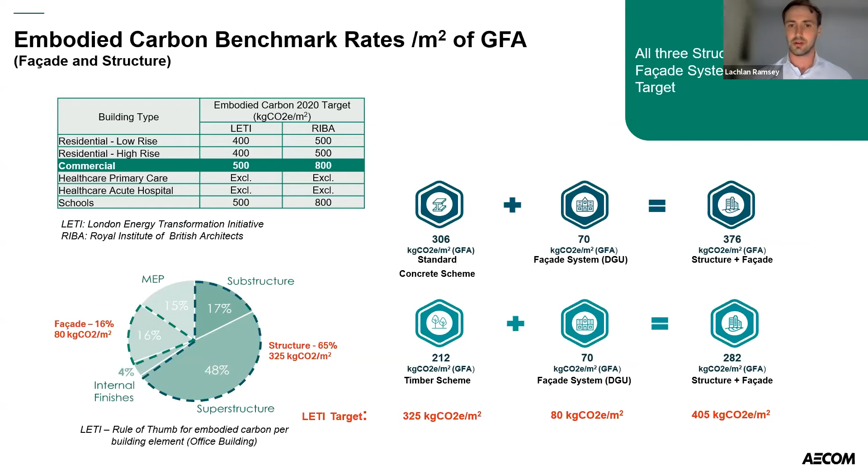And we expect that there may be some influence there due to the fact that we use a lot of post-tension concrete in Australia, which results in thinner floors and potentially quite a bit less reinforcement than just a reinforced concrete option. Maybe one of the reasons as to why that is a bit lower as well.

So just the final part of our study was unpacking and understanding that difference between the embodied carbon that was in the better glazing systems versus the performance over time. So this blue line that's shown on there, you can see that it's sort of tapering off as it goes over time. And that's the effect of this all electric building and the grid decarbonising as we move towards our net zero 2050 targets. So you pay that penalty by having a greater embodied carbon element in your facade system when you go from double to triple glazing.

But there is an increase in performance, which is actually lowering those emissions that you're emitting year by year. So there's an offset point where that penalty actually pays off, between the efficiency of the system taking over from the extra that you put into the system to start off with. So for the single glaze units against the double glaze units, that point occurs at 6 years. From the single glaze to the triple glaze, that occurs at 9 years.

But interestingly, from the double glaze unit to the triple glaze unit, which this building actually was upgraded to be a triple glaze system, it never actually offsets itself. The carbon in the system is always still greater under the triple glaze unit system. And when we ran other models with the gas as well, it showed it was around about 30 years for that offset, which is around about the replacement period for a facade.

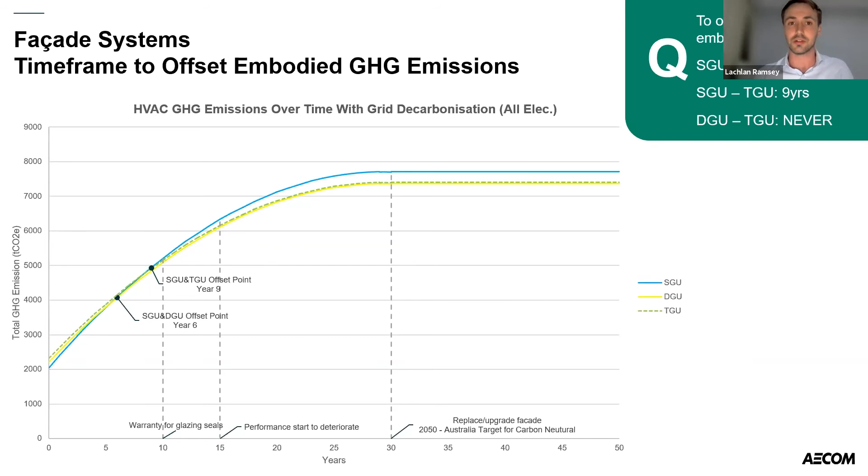So to summarize what Ricky and I have spoken about, I suppose it's been talked about already too, is starting that conversation early, because the choices about the form and materials are often made at the earliest inceptions of the project. And it really is up to the structural engineers and the architects and the clients to really understand it, because the ESD teams often won't be engaged until months later in the project. The embodied emissions in the materials have often been overlooked in favour of focusing on the operational emissions, and there's a really large potential to reduce your whole life cycle emissions by focusing on this embodied carbon part, and we really need to be doing this.

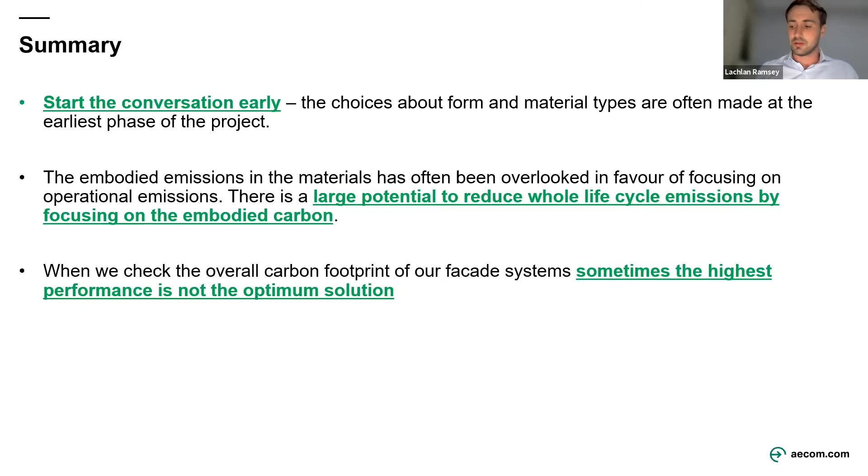And that when we look at the overall carbon footprint of our facade system, sometimes the highest performance is not always the optimum solution.

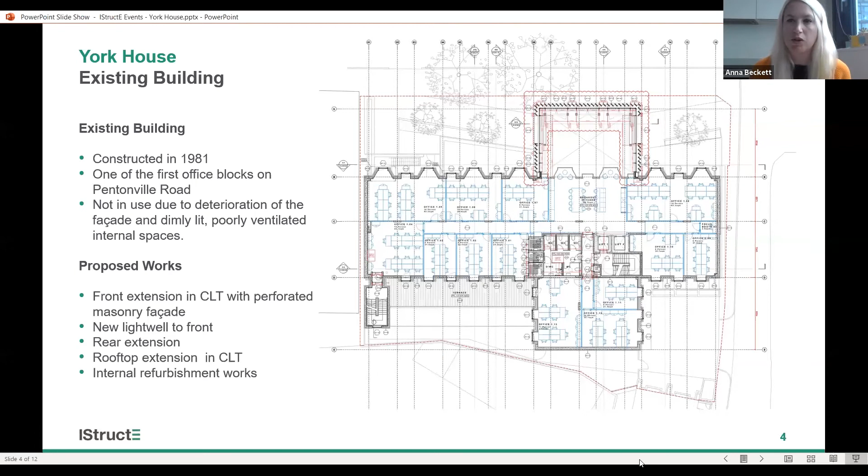This was the roof as it was when we arrived at this project, fairly typical of these types of buildings, with the space, it's just got gravel on top of insulation and a window cleaning rig around the edge. But I've included it because the roof wasn't designed to even take plant equipment. It was only really designed for very lightweight roof load.

So one of the main issues for us extending on top of this existing building was that this roof structure couldn't really take very much additional load. And so making the rooftop extension lightweight was quite important when we started looking at this.

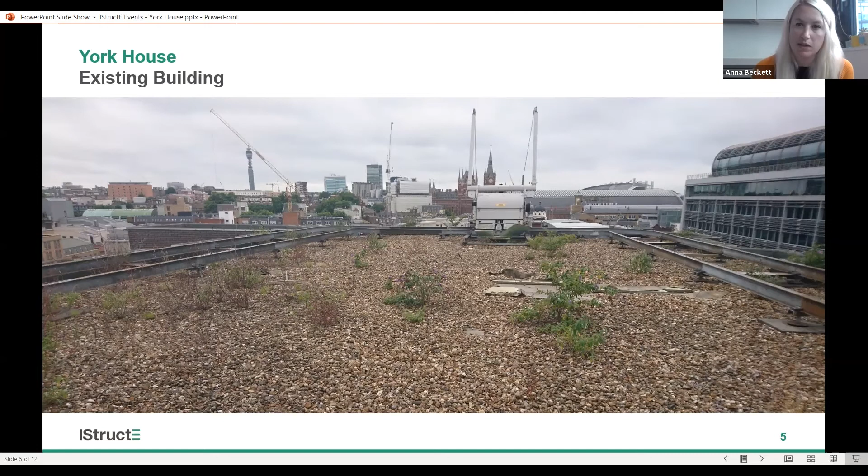We originally proposed the idea of doing extensions in CLT to the architect because it made sense structurally to do that, particularly for the roof extension. Like I said before, we needed something that was going to be really lightweight. And the architect was very much on board with that. We then proposed it to the client.

And when we talked to the client about it, we initially came with it as a suggestion because it would work for their spaces rather than because it was a low carbon solution. So we proposed it because it would be a warm internal space, it would look really beautiful, it would add to the idea of this being a more aspirational office space, and the fact that it was going to be good for the environment, low carbon, was actually an added benefit to them rather than the main selling point for those extensions.

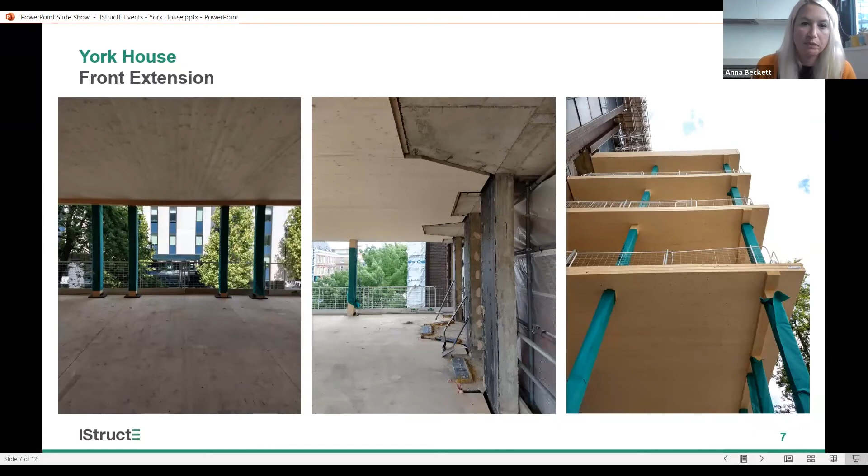Similarly, for the roof extension, we again talked to them about how it would create this really beautiful space, that it would feel really warm and welcoming, and it was a really nice space for well-being and enjoyment of the building. And secondary to that was this idea that it was going to be also low carbon.

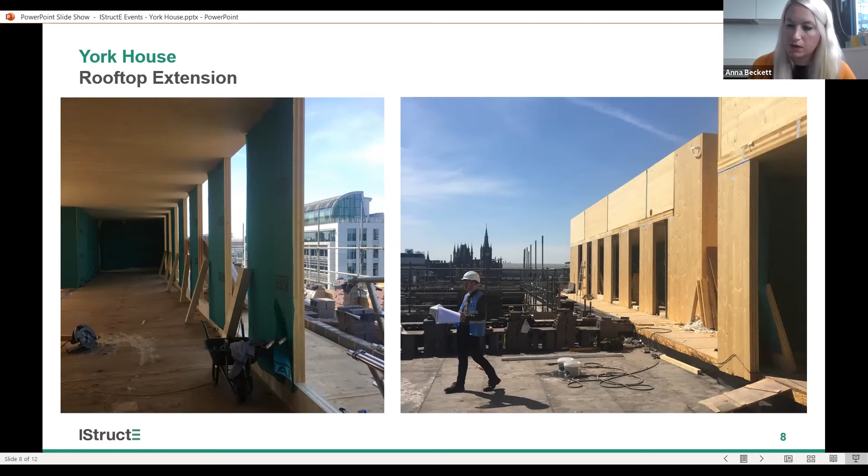The contractor was a little bit more difficult to persuade. They were, as you would expect, worried about cost and also worried about how easy it was going to be to build. It's a very tight site. As I said, it's right on Pentonville Road, and obviously you can't close Pentonville Road to put in a crane to lift stuff onto the roof.

We didn't really have very much space on the site where we could put a crane. It was difficult to get deliveries because, again, you can't block Pentonville Road. And the Northern Line is running below Pentonville Road as well. So there's quite a lot going on, and they were concerned about getting materials up onto the roof. They wanted us to change it to be just a steel frame. And so we worked through how you could actually build this.

And in the end, what we did was installed the foundations and the slab for the front extension first, and then used that as a base for a crane so that they could then lift up the CLT onto the roof. And actually, because the CLT is so lightweight, we could lift it up in these bundles and we could store it on the roof for them to use, even though the roof had this reduced capacity. And obviously we had to suggest to them how they might spread that out and make sure we didn't overload any parts of the roof, but it all meant that it could much more easily be constructed within those really tight confines of the site.

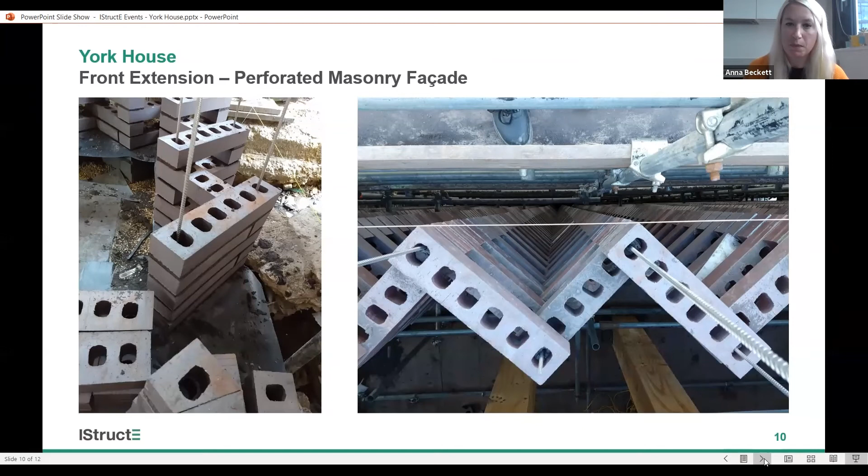So the embodied carbon, overall, in the end, for the structure and the masonry, I think we had about 250 kilograms of carbon per metre squared. And then when we add in everything else, all non-structural items, finishes, partitions and services, it's about 400 kilograms. We've talked lots about all the different things you can measure it against. We've generally been comparing to the RIBA 2030 target, which I think is 500. So we still were well below that. And then actually on top of that, we have the values from the sequestered carbon in the timber as well, which would obviously reduce that further.

I've added a note here about the light well. The light well is by far the worst part of the building in terms of carbon. It's piled concrete and it adds very little floor area. But actually, by adding the light well, it meant that the basement space, which would have otherwise been unused or used for storage and things like that, could actually be added as additional floor area that was lettable as office space.

So the reason I mention it is because I think it's much better to have put the carbon, or the worst use of carbon, in a place where it actually makes a really big difference and means that there's parts of the existing building that can be used much better. And so, yes, that is the worst part, but actually it does make a really big difference. It made a big difference to the client, and it meant that there were parts of the building that could continue to be used as part of the new building in an efficient way.

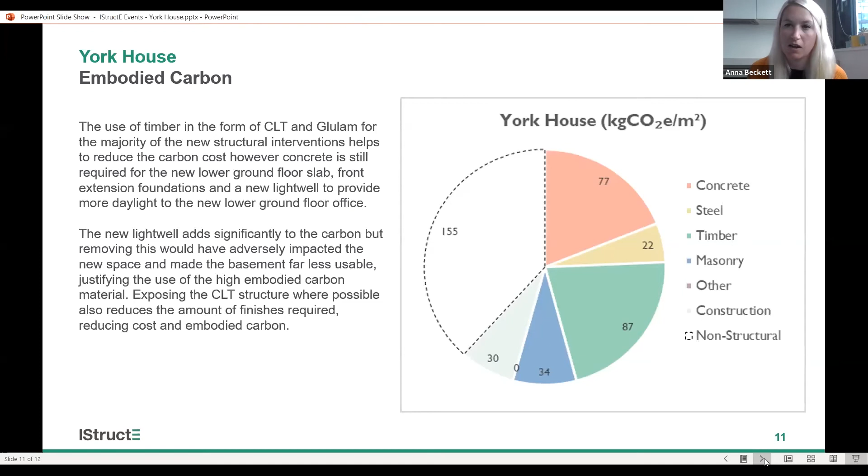Thank you, Will. No, that's brilliant. Thank you, Anna. I mean, it's another really good example, isn't it, of how reusing what we've already got doesn't have to mean, you know, there used to be preconceptions about that. Oh, it would have been nicer to just have a new building, but if you walk down the road and look at York House, you wouldn't know that it was an existing building with a small extension on the front of it, I don't think.

No. Quite a good transformation. Thank you for presenting on that. We've got 15 minutes or so for Q&A. Keep the questions coming in the chat, and I'll try my best to squeeze in as many as we can.

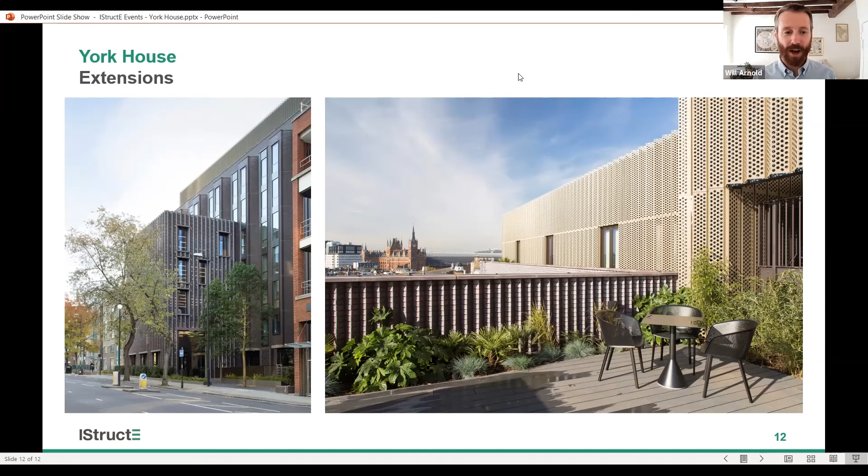I'm going to pose the first question to Rosie, because we've had a couple of questions around planting trees and on security in Rwanda, which I thought you might be able to answer for us. So firstly, how much tree planting was required to offset the construction of RICA? And I guess whilst answering that, you might give us your thoughts on how you would apply this to a different project. Say if you were trying to build something in a city, what would you do then in terms of, could you plant trees, or would you have to look at something else?

And then the second question, which is very Rwanda specific, but I think we should ask it anyway, security when sourcing materials, and I don't know if that means in terms of sort of life safety security or supply chain reliability, but maybe you could talk a bit more about material sourcing for RICA as well.

Yeah, so obviously for RICA, we had the benefit of a huge site. It was a major project with major infrastructure, and so the tree replanting that is planned is around 40 hectares. That's just approximate. It's still a work in progress, but obviously, yes, significant area there that might not work on Pentonville Road, for example, where you're really just going to be confined to things like green roofs, and you might need to target a much lower embodied carbon in the first place.

And in answer to your second question, Rwanda is very safe despite probably the history that it's associated with. So in terms of personal security, going and sourcing materials, that wasn't an issue, but the supply chain security was. So for example, a lot of the timber that we have in Rwanda that's available at the market comes from DRC or other unknown sources where the forests are not necessarily managed sustainably. And so in order to not contribute towards deforestation, we had to make sure we knew exactly where our timber was from.